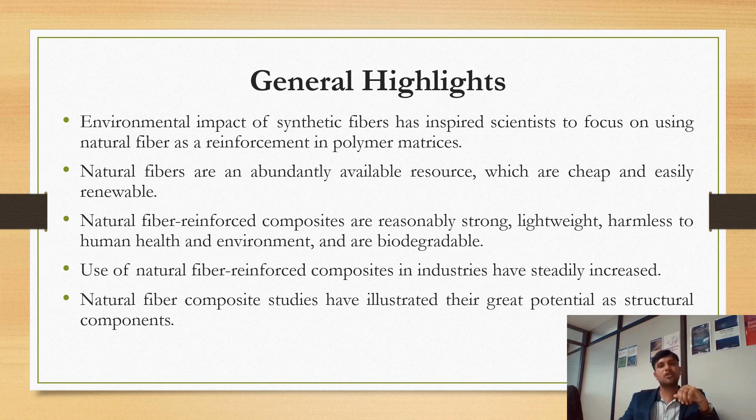Also, the use of natural fiber composites in industries has steadily increased, benefiting fiber plant production and the world's economy, which means it will be indirectly helpful for our farmers and agriculture. Recent developments in natural fiber composite studies have illustrated great potential as structural components in various applications.

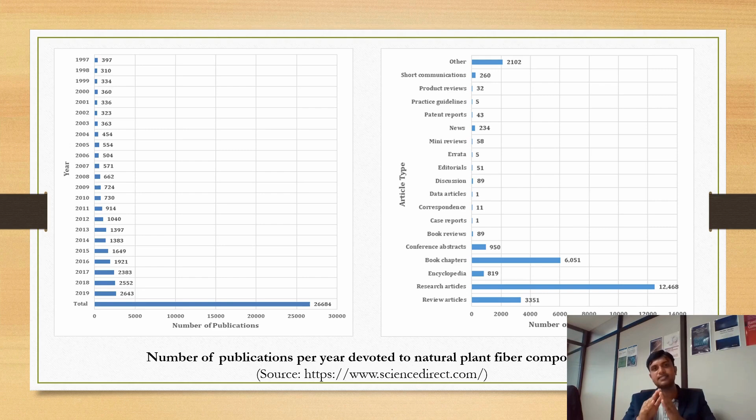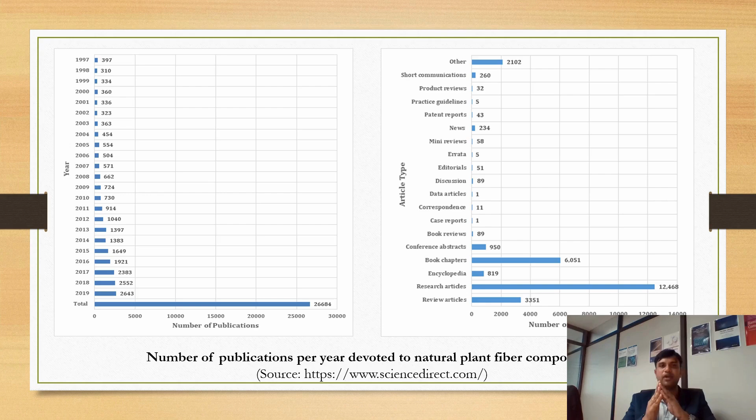See this figure. It represents the number of publications based on materials composed of natural plant fibers between 1997 to 2019, found in Science Direct using the keyword natural plant fiber composite. Each year there has been a steady increase in the number of published works, meaning natural fiber composites is one of the notable research areas for development of eco-friendly materials.

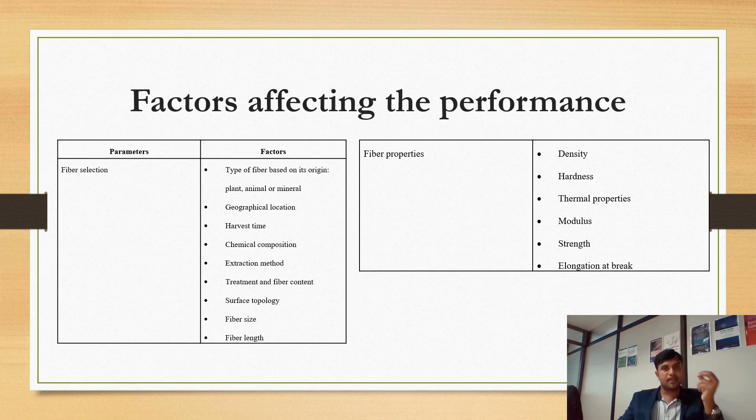The first factor is selection of natural fibers based on parameters such as type of fiber based on its origin. That means fiber derived from plant fibers, as I mentioned before, such as kenaf, jute, sisal, etc., come under plant fibers. Animal fibers such as wool, hair, feathers from birds, or mineral fibers like basalt fibers, even geographical locations based on environmental conditions, harvesting time, and chemical composition.

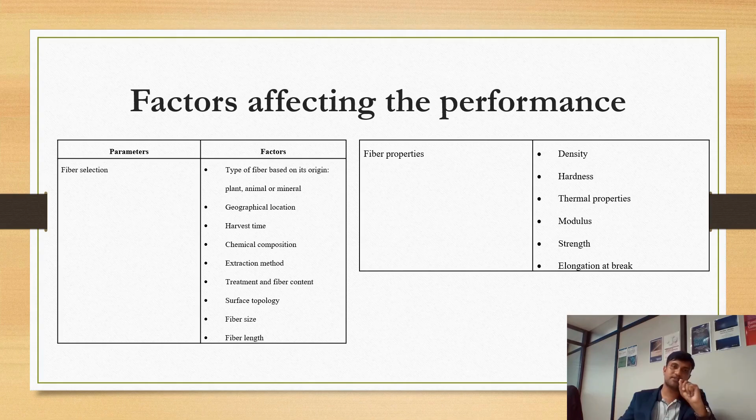That means chemical composition of natural fibers such as cellulose, hemicellulose, lignin, extraction method, chemical treatment and fiber content, surface topology, fiber size, fiber length. We can even do new research based on the properties of natural fibers such as density, hardness, thermal properties, modulus, strength, elongation at break, etc.

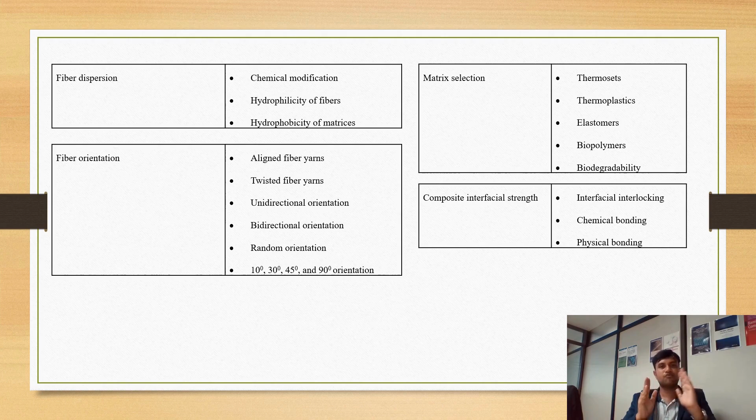Fiber dispersion in composites depends on bonding between fiber and matrix. As we know, natural fibers are hydrophilic in nature, and the matrix is hydrophobic in nature. So chemical modification is the only solution to reduce the hydrophilic nature of natural fibers, which helps increase the bonding efficiency between fiber and matrix in composites.

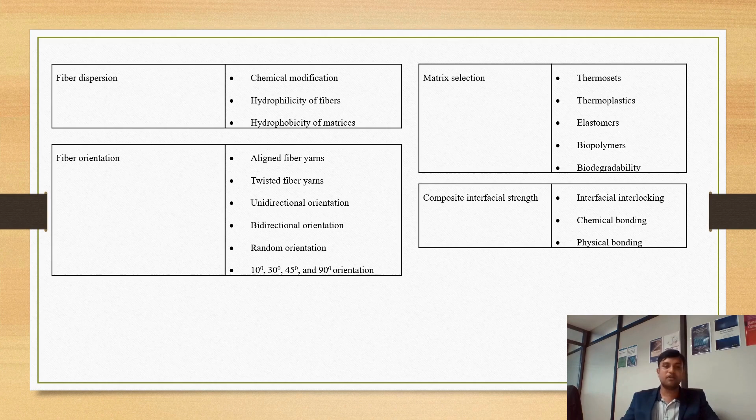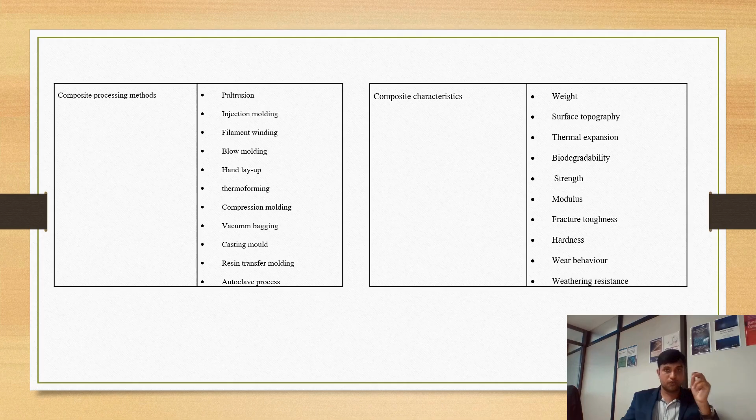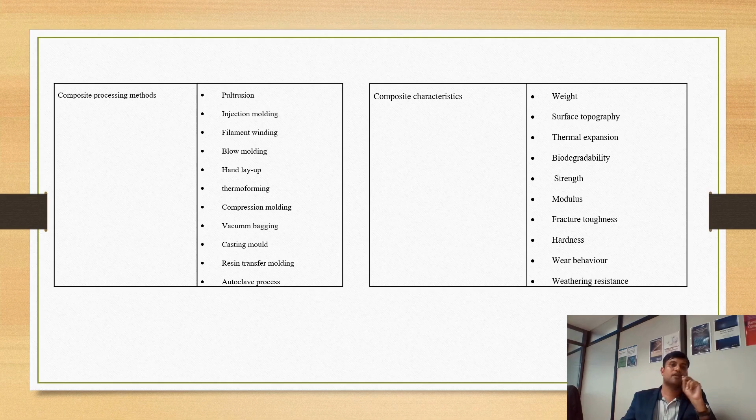We can also do work on orientation of fiber to improve the properties of natural fiber composites. Other factors such as matrix selection, like thermoset, thermoplastics, biopolymers, and composite interfacial properties are also considered for improvement of performance of natural fibers. We can also do work on composite processing method and composite characteristics.

Now I'm going to explain performance and durability aspects of natural fiber composites using noteworthy results of my own publications. This research study covers the extraction and characterization of waste fibers from water hyacinth plants, and the fabrication of bioepoxy based eco-friendly composites from chemically treated water hyacinth fibers.

Water hyacinth is an aquatic plant collected from near the Chao Phraya River, Bangkok. In this research, the water hyacinth fibers are chemically treated by NaOH, meaning sodium hydroxide, and silane solution, with bioepoxy as the matrix material for making composites.

The raw, NaOH treated, and silane treated water hyacinth fibers reinforced bioepoxy based composites are manufactured by the casting method. Different tests were carried out on the prepared composite specimens. This research revealed that composites made from chemically treated fibers, either from NaOH or silane solution, have better results compared with raw fiber reinforced composites.

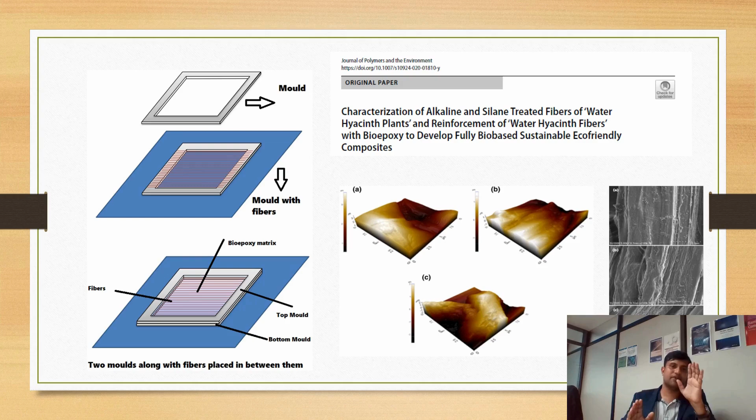This study confirmed that water hyacinth fibers can be used as a reinforcement material with bioepoxy polymer to develop fully bio-based eco-friendly composites for the production of lightweight structures. This is one work.

This is another work. This investigation is an attempt to develop kenaf/sisal fiber fabric reinforced bioepoxy hybrid composites, and we assess the performance of the composite under accelerated weathering conditions.

The bioepoxy resin and kenaf/sisal fiber fabrics were used for making hybrid bio-based composites, manufactured as composite laminates using the compression molding method. For comparison purposes, a neat bioepoxy thermoset was fabricated using the casting molding technique.

To promote accelerated weathering of composites, the samples were exposed to environmental conditions such as ultraviolet radiation, extreme temperature, and humidity conditions in an accelerated weather tester machine, according to ASTM G155-13 cycle 1.

Tensile, impact, morphology, TGA, DMA, and water absorption tests were performed for both before and after weathering test samples, according to international standards.

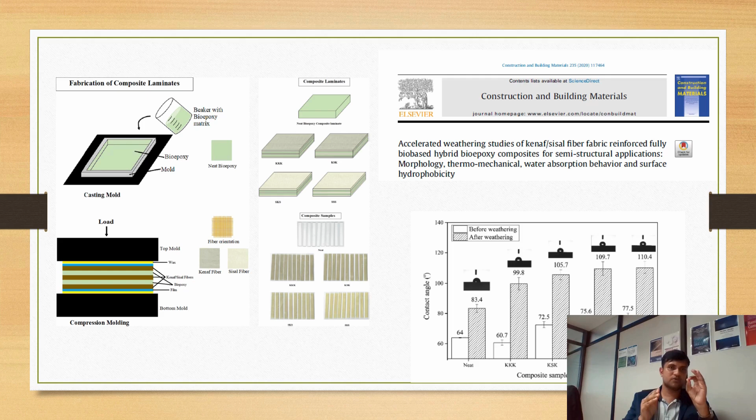This means reinforcement of natural fibers in polymer composites can increase the properties of composites. Also, from the results, it is worth pointing out that these fully bio-based composites are promising composite materials for semi-structural applications.

This investigation is an attempt to assess the hybridization effects of different laminate stacking sequences involving jute and e-glass woven fabric. The composite laminates were fabricated using the vacuum bagging method.

This study reveals that the vacuum bagging method is a very effective method to prepare composites with low void volume fraction. The tensile properties of composite laminates were influenced by the strength and modulus of the fibers.

The tensile, flexural, and hardness properties of composite laminates mainly depend on the sequence of high strength fiber plies in the laminates, and are also influenced by the stacking sequence and adhesion levels of the fabrics.

It is also noted that the hybrid laminate having glass plies as skin layers and natural fiber plies as core layers showed better tensile, flexural, and hardness properties.

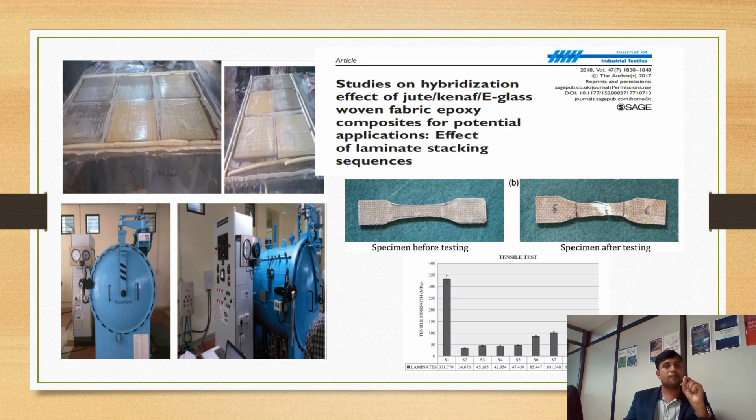Also, from SEM (scanning electron microscopic) analysis, it is evident that good composite properties depend on the presence of fewer voids and proper adhesion between fiber and matrix.

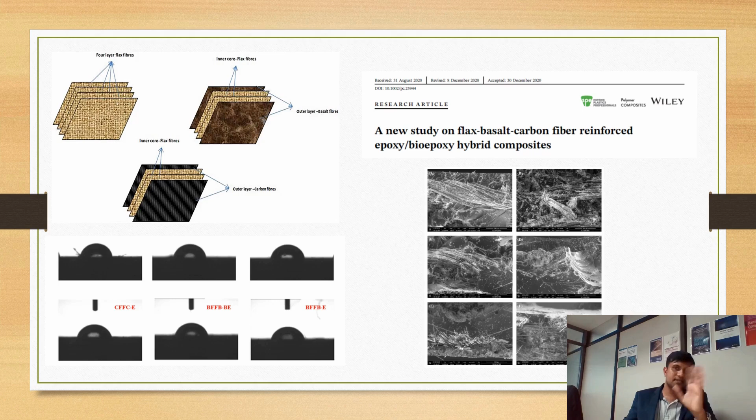This research investigates the development of composites from flax, basalt, and carbon fiber reinforced with both bioepoxy and synthetic epoxy under different stacking sequence techniques. These composites were fabricated using the manual layup method and compression molding technique.

This investigation revealed that the hybrid laminate having basalt fiber, meaning mineral fiber, or carbon plies, meaning synthetic fiber, as skin layers and natural fiber plies as core layers showed better tensile, flexural, and hardness properties.

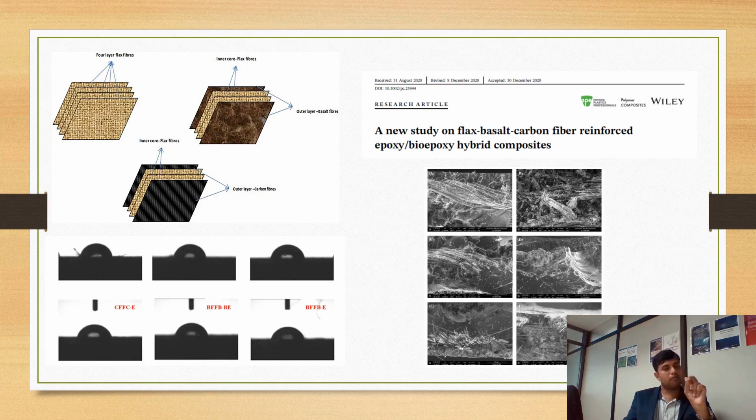From this research, it is also noted that mineral fiber, that is basalt fiber, is also a viable material for replacement of carbon or any synthetic fibers.

This research investigation intends to recognize the effect of laminate stacking sequence of natural fibers, e-glass, carbon fabrics reinforced hybrid epoxy composite. Here we have used one natural fiber and two different synthetic fibers. Manual layup method was used as a fabrication method, while studies on mechanical and morphological properties were conducted. From the results, it is obvious that the properties of natural fiber, e-glass, carbon fiber reinforced epoxy composites enhanced due to hybridization, meaning the properties increase by addition of either e-glass or carbon fabrics in natural fibers.

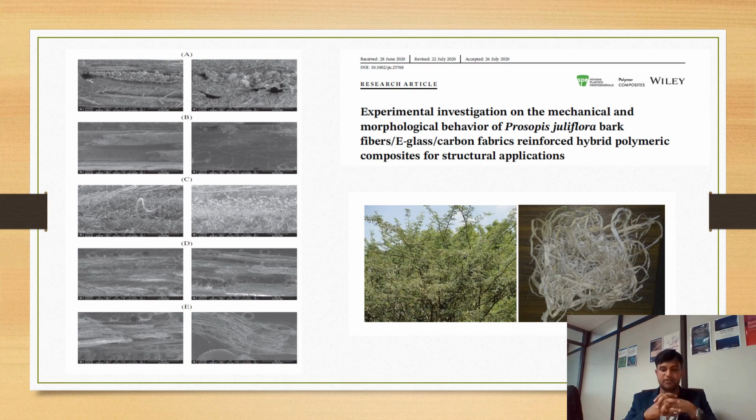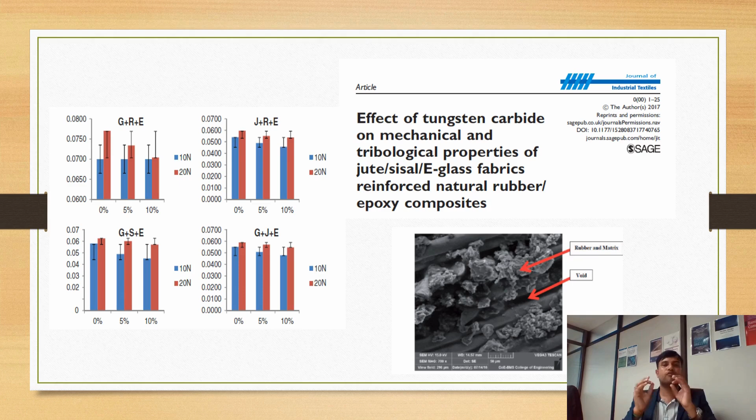This work is based on performance of hybrid composites improved by using different natural fibers and adding particulate fillers. In this study, we examined the mechanical and tribological properties of jute, sisal, e-glass fabrics reinforced with a matrix such as natural rubber and synthetic epoxy, filled with different proportions of tungsten carbide (WC) powder. Research revealed a significant change in mechanical properties and enhancement of wear behavior due to incorporation of filler particles. This means filler loading can increase mechanical properties and decrease wear rate by improving bonding between fiber and matrix.

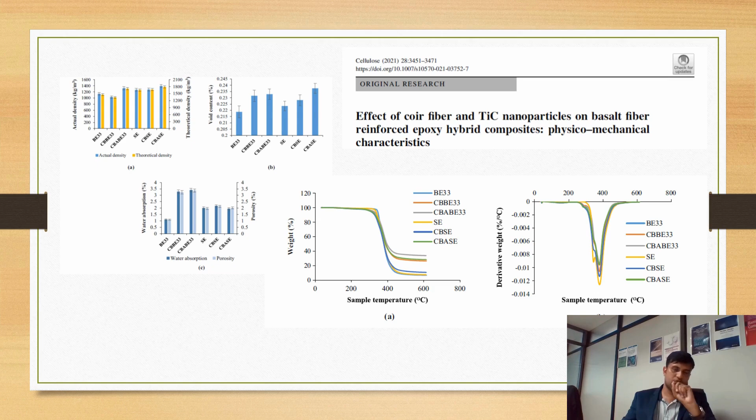This investigation was performed to study the effect of titanium carbide (TiC) nanoparticles and coir fiber as hybrid reinforcements on physical, mechanical and thermal stability of basalt fiber incorporating titanium carbide epoxy composites. This work proves that incorporation of TiC nanoparticles in basalt fiber epoxy composite exhibited improvement in mechanical characteristics.

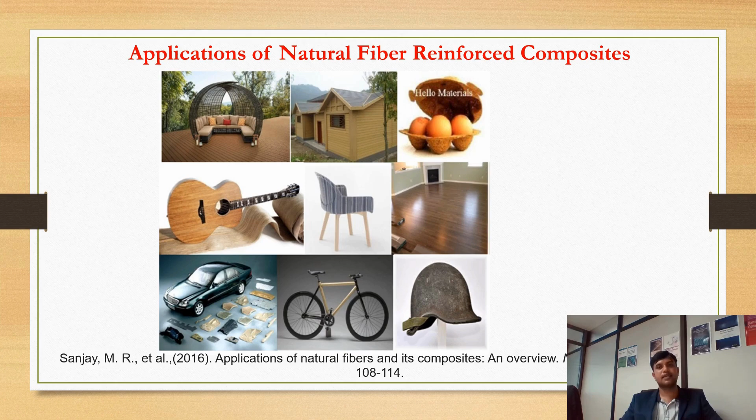In the marine field, they find applications in manufacturing of boat hulls, fishing rods, etc. In the sports sector, they are used in manufacturing of tennis rackets, bicycles, sports helmets, etc. They are also utilized in manufacturing storage devices like post boxes, grain storage silos, and biogas containers.

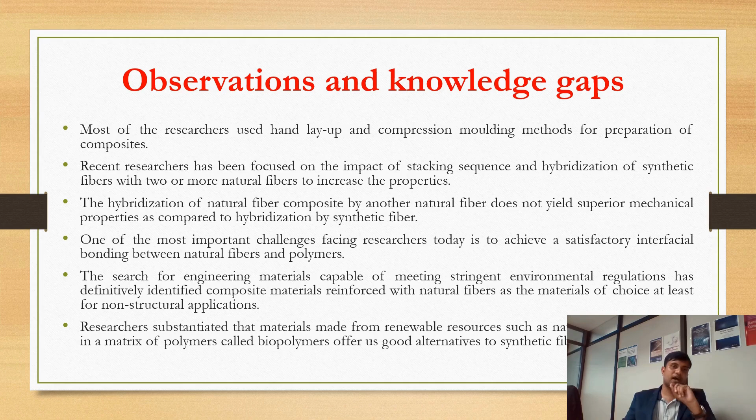Composite materials reinforced with natural fibers are the best option to replace synthetic fiber composites, at least for low load applications. Researchers have substantiated that materials made from renewable sources, such as natural fibers embedded in a matrix of polymers called biopolymers, offer a good alternative to synthetic fiber composites.